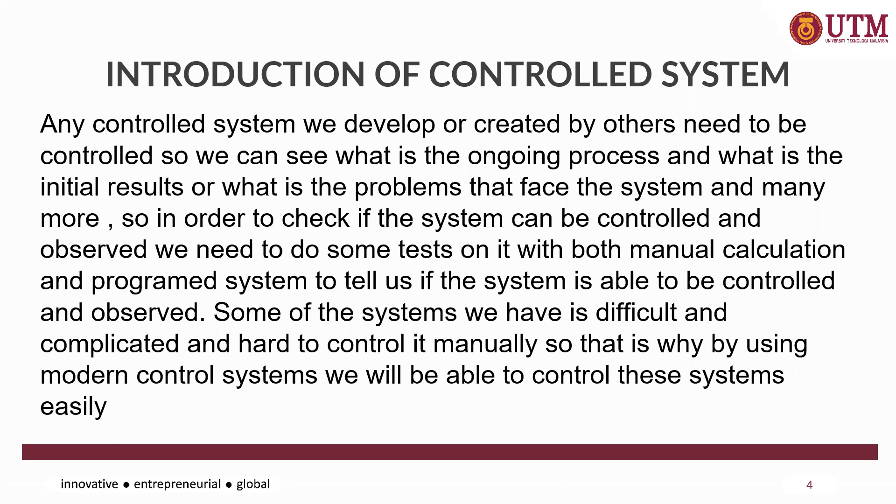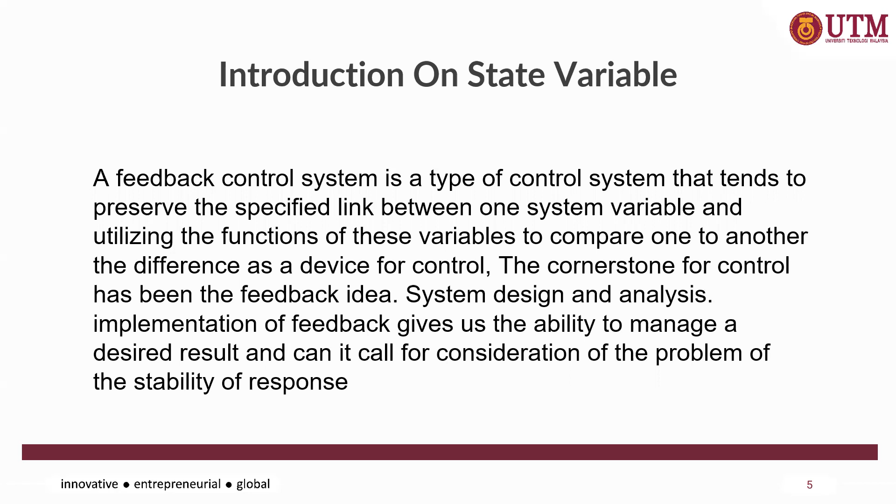Introduction on the state variable. Feedback control system is a type of control system that tends to preserve a specified link between one system variable and utilizes the function of these variables to compare one to another. The feedback idea has been the cornerstone for control system design and analysis. Implementation of the feedback gives us the ability to manage the desired result and allows consideration of the problem of the stability of response.

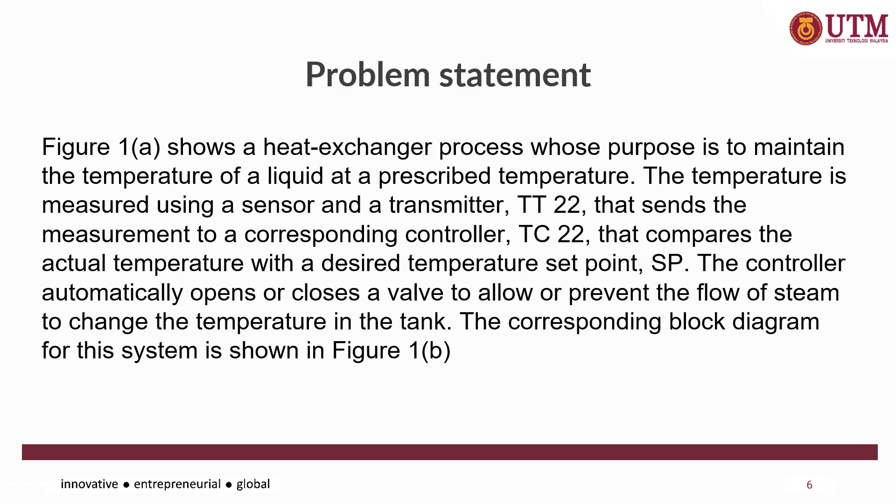The problem statement, as shown in the figure, is a heat exchanger process whose purpose is to maintain the temperature of a liquid at a prescribed temperature. The temperature is measured using a sensor and a transmitter that sends the measurement to a corresponding controller that compares the actual temperature with the desired temperature set point. The controller automatically opens or closes a valve to allow or prevent the flow of steam, changing the temperature in the tank. The corresponding block diagram for the system is shown in figure 1b. This is the problem statement figure, the system itself, and the transfer function.

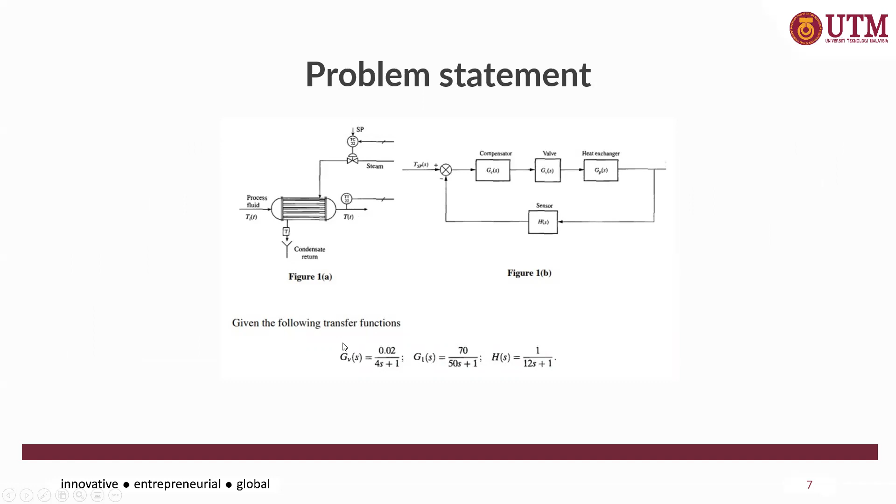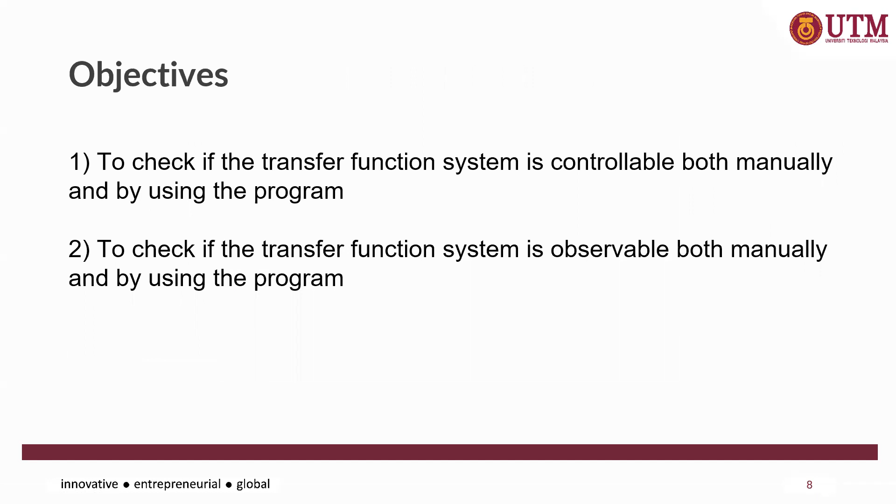The objectives: first, to check that the transfer function system is controllable, both manually and by using a program. Second, to check that the transfer function system is observable, both manually and by using the program.

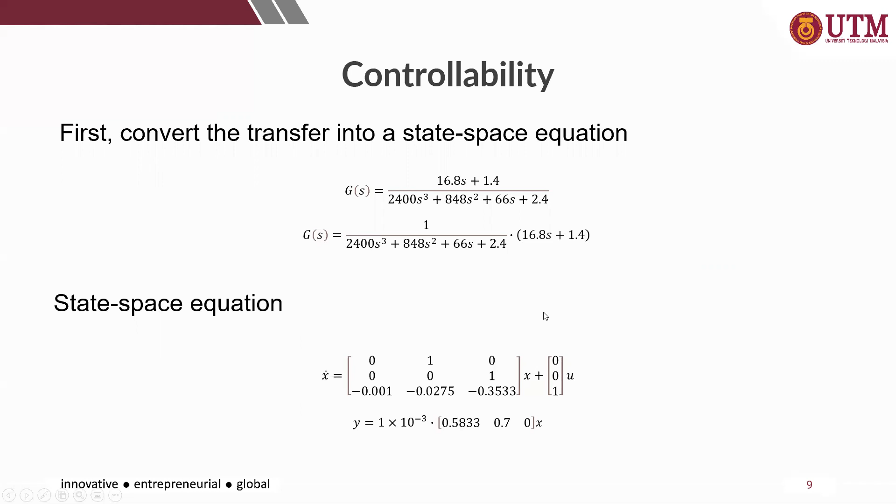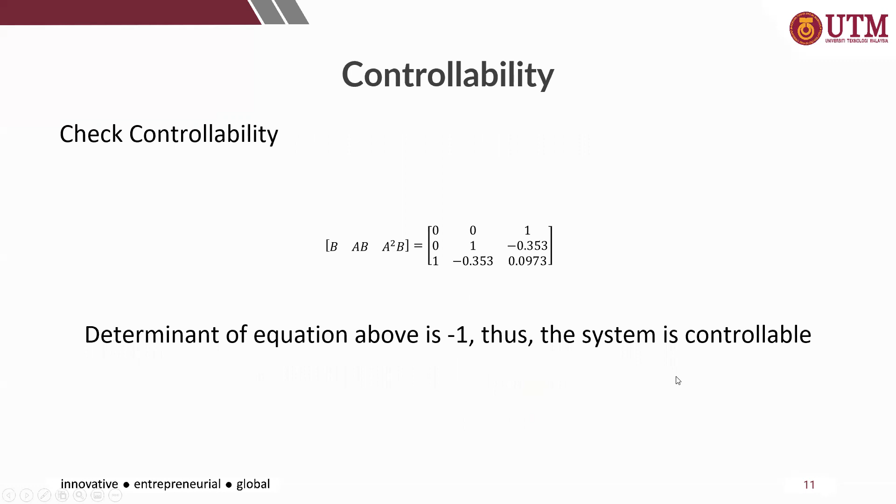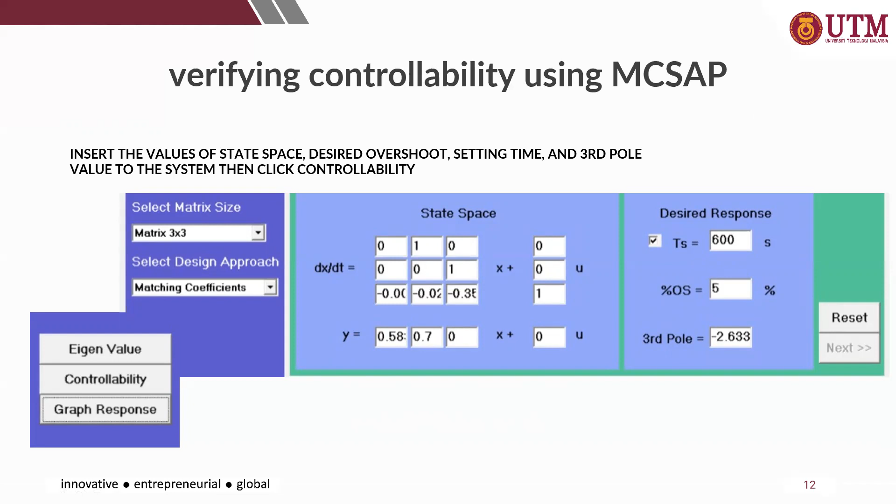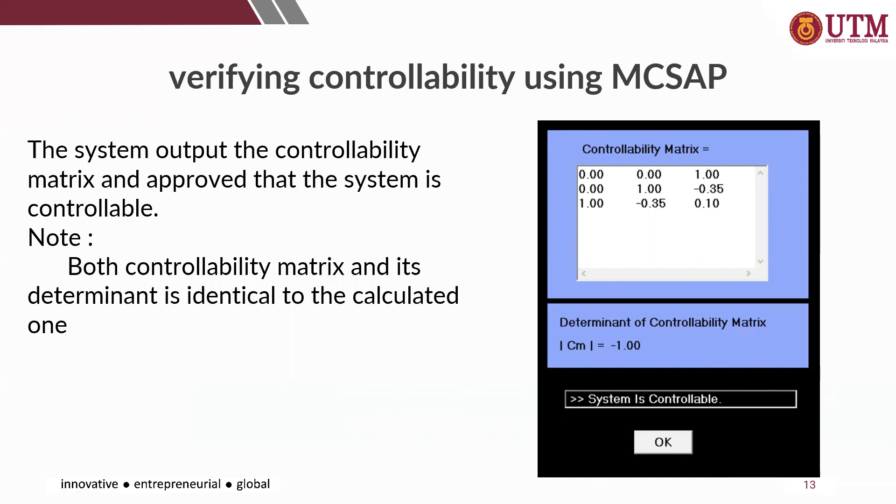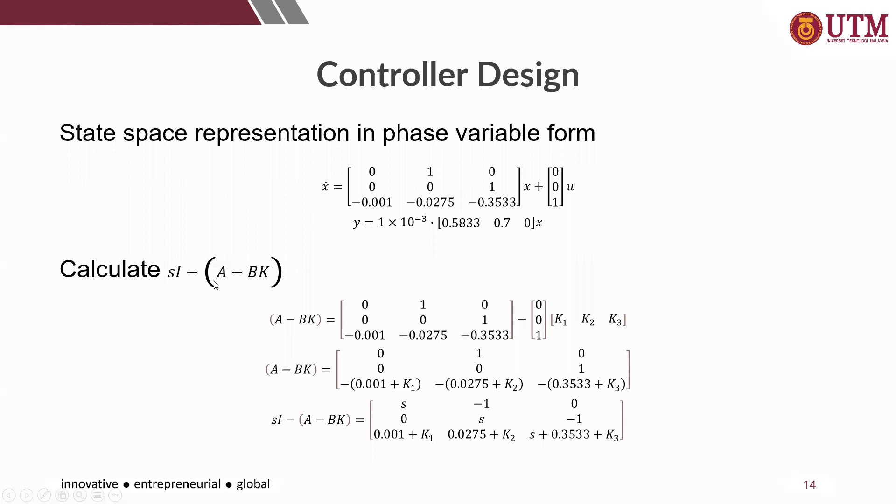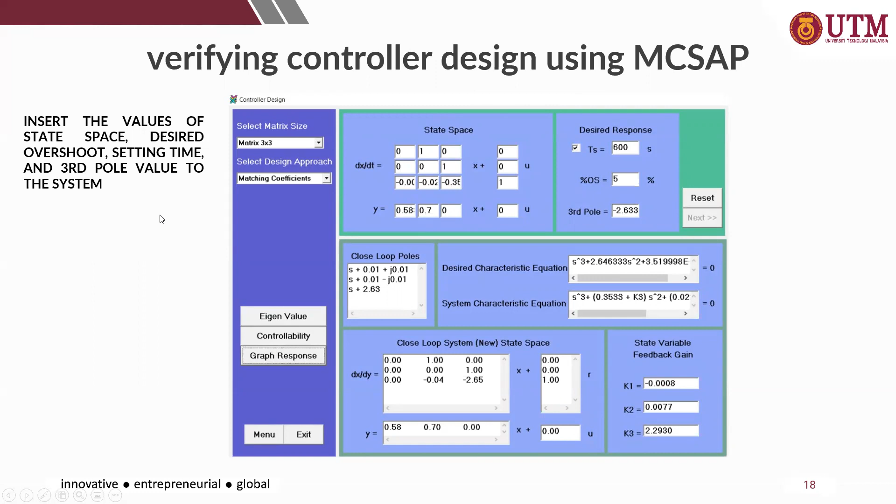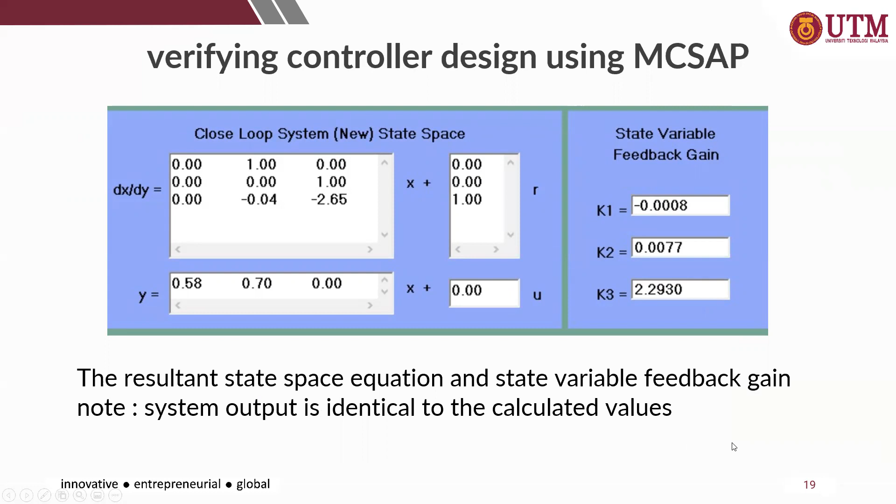Controller design: state space representation in phase variable form, then calculate sI minus A minus BK, and proceed with the controller design to determine zeta and omega n. After that, we resubstitute and compare, then find the transfer function, and verify the controller design using MCSAP by inserting the values of the state space desired overshoot, setting time, and third pole into the system. We can then see the result state space equation and state variable feedback gain. Note that the system output is identical to the calculated values. So verifying the controller design using MCSAP, this is the system response graph after controller design, showing the equivalent transfer functions.

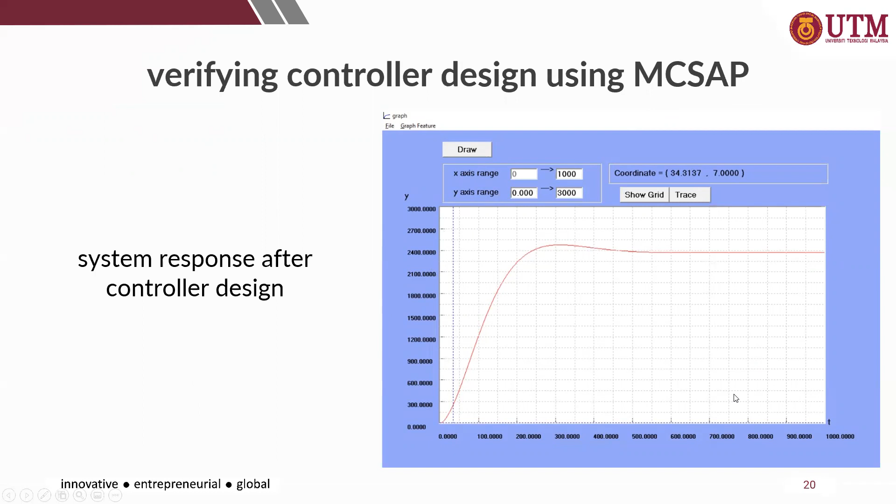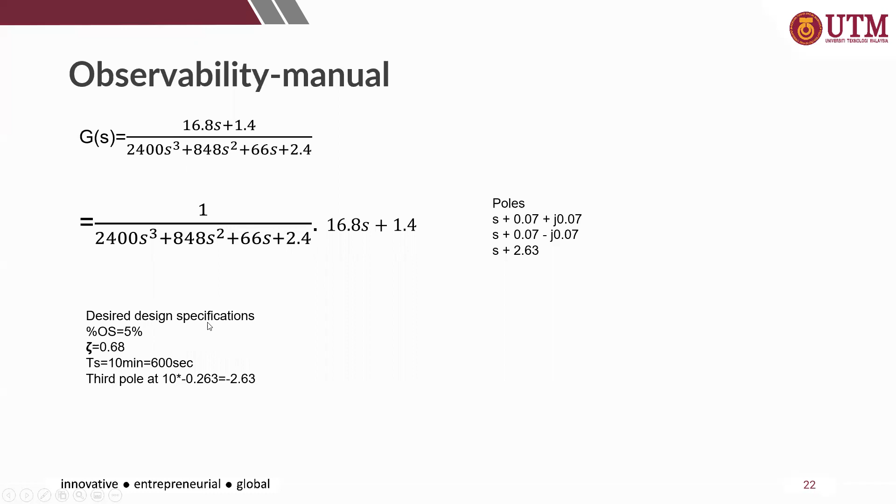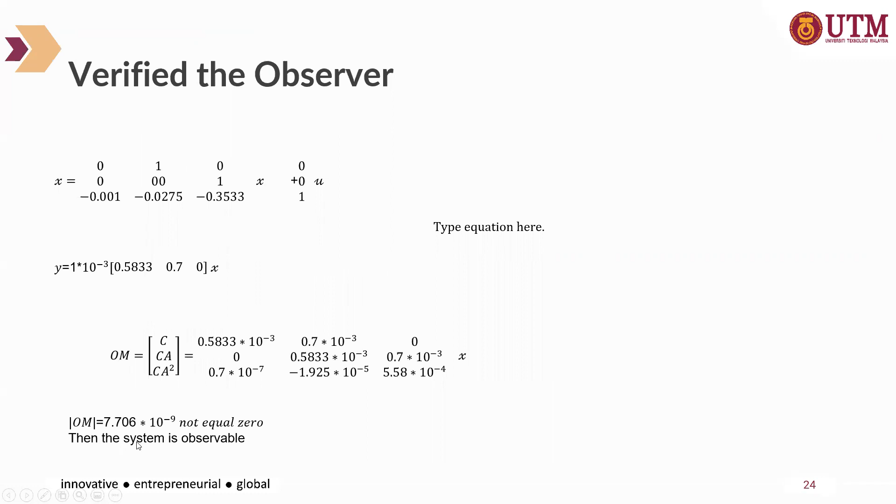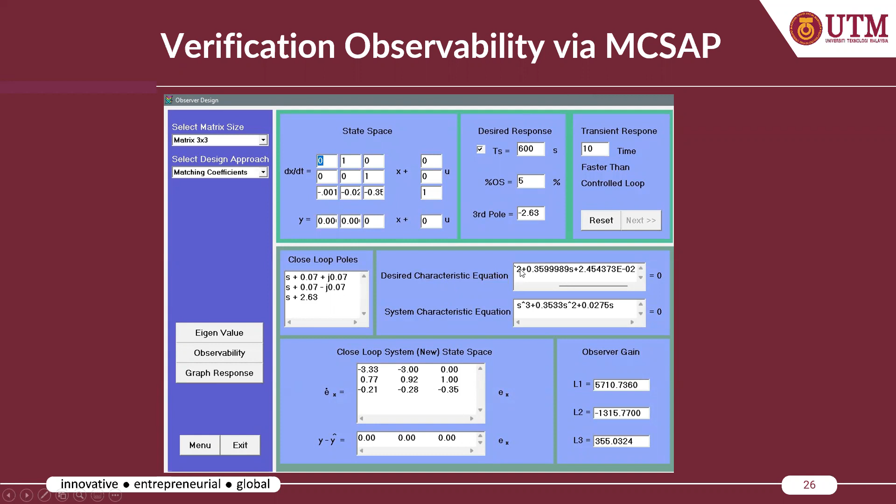In conclusion, after checking both controllability and observability of the transfer function, both manually and using the program, we can identify that this transfer function can be controlled and observed without any problems. We checked the manual calculation and the programmed calculation, and got the same results for both, showing that the system can be controlled and observed. Therefore the system is easy to use, observe, and control in the future.